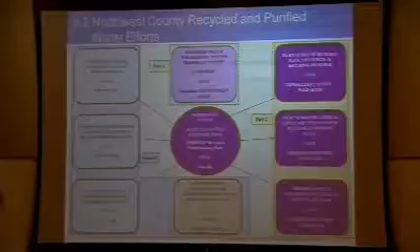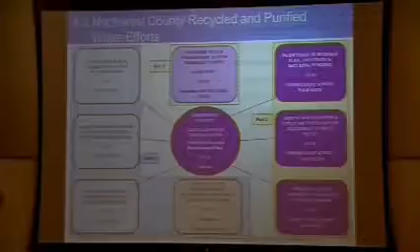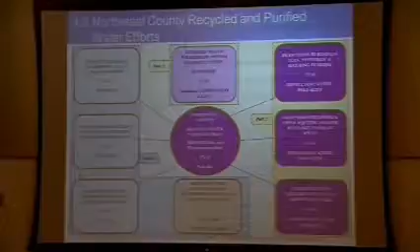You've seen this sort of diagram before, and the purple parts of it, dark purple, are what would be incorporated in this strategic plan that was before the district in July. We're still seeking approval of the cost sharing agreement with the district to move forward on a contract for those 4 purple elements. You'll notice all of them on this whole page really roll up into this strategic plan.

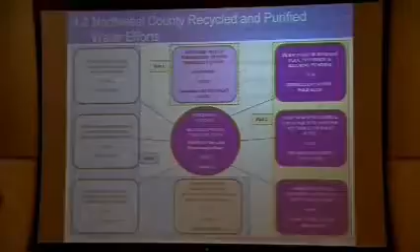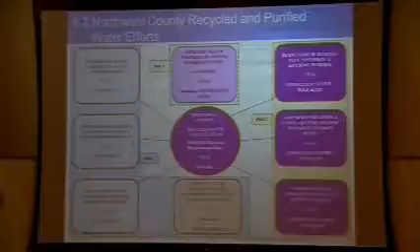So the center circle, the strategic plan itself, is something that wouldn't happen immediately. It would happen as the 3 parts to the right are completed and fed into it, and then the other elements are fed into it. We've been talking about, and it is a little bit confusing because there are a number of ways it could ultimately happen, that we tie the various systems together in the county.

So at the bottom, you see in sort of a brown color, Mountain View's efforts. They have several contractors over time who are working on their own expansion plans for their distribution system, and it says, and Sunnyvale tie-in. So think of it as a smaller tie-in, as Greg Hosfeld described, to be worked out in the future, but we would then bring that up into the strategic plan itself.

You'll notice this recycled water strategic plan doesn't include an element for what you might call a much larger tie-in, where a pipeline you could imagine could be built from the Palo Alto treatment plant to points south. And that's not on here.

I expect that in the MOU that we talked about just now, between Palo Alto, Mountain View, and the Water District, that'll be one of the key things we'll address, is how are we going to accomplish the work to evaluate that idea, what I'd call a larger tie-in, not just the Mountain View, Sunnyvale little arteries connecting with one another, but rather some larger tie-in.

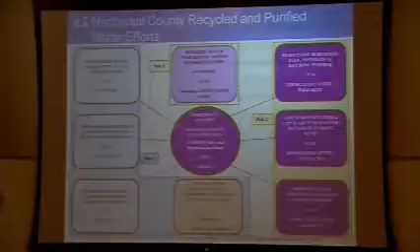We've kind of all agreed, district staff also, that more work needs to be done to draw conclusions about the aquifers in the Northwest County and the extent to which they would benefit from what you might call recharge, what you might call storage. That whole thing needs to be better explored. And we've talked about this before. Councilmember Siegel wanted to make sure that we also explored the plumes that exist, the contaminated areas in Mountain View and Palo Alto, which unfortunately are extensive, and we'll certainly be doing that.

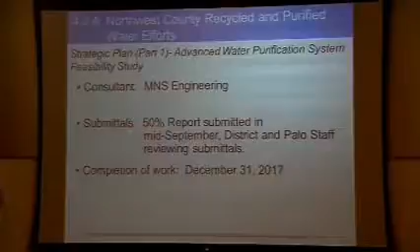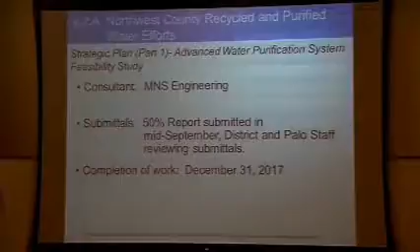So again, just to sum up, those 4 purple bullets constitute what we've called the contract effort, which we are wanting to see move forward now. Oops, what am I doing? Too far. All right. So a different contract that was actually in the upper left-hand corner of that previous chart was the work that we're doing to look at a relatively small first step to advanced water purification at the Palo Alto treatment plant site.

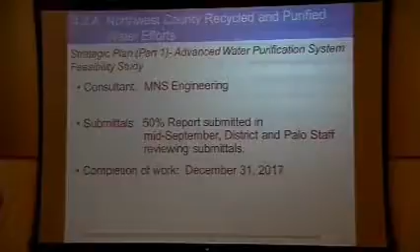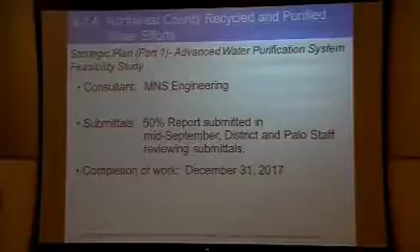The consultant has been selected, MNS Engineering. They're actually 50% done with the core tasks, and we expect to be 100% done with those core tasks by December of 16. And then that last bullet says completion of all of the follow-up tasks would be December of next year, 2017. So by December of this year, though, we hope to have a pretty good feasibility study on the first steps, small plant, to do reverse osmosis and to upgrade our water quality, lower the salinity for the Palo Alto and Mountain View recipients. And we're excited about that.

We've identified several places on the site, our Palo Alto site, where a relatively small plant of 1 to 2 MGD could fit. It's tight, but it looks very doable. So we're excited about moving ahead on this. I'm going to turn it back over to Garth. I think he wanted to do this one.

Committee members, so on page 46 of your handout is a quick replay on what Mr. Boble mentioned just related to that chart back on your page 44. So these are, in the terms of that strategic plan, those relate back to the blue-purple circles, or the circles and squares on that chart. These are the key things that would be involved in the strategic plan, and that is, first of all, look at expanding the recycled water pipeline, the one that has already been contemplated and mapped out in terms of EIR work, to South Palo Alto and Stanford Research Park.

And then the final one would be, I think one of the questions came up is, what is the footprint of all these studies? And this really talks about it is to all of the TRIB agencies that provide wastewater into the Palo Alto plant. That is the target of the partner agencies here, as well as the Santa Clara Valley Water District. So the expansion of recycled water would be looked at to each of those entities to see how feasible it would be.

So, and back to Director Kremen's question earlier, what is the end product? The products, once deliverables are completed, would not be at the point where commercial terms are ready, but that would be the leaping point from which commercial terms on any of those that prove to be feasible and are well-funded and supported by the entities involved would be an opportunity to move forward with that.

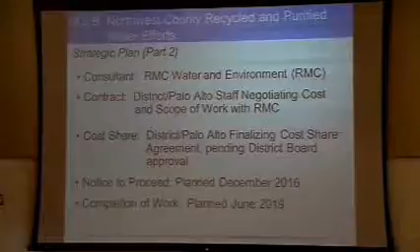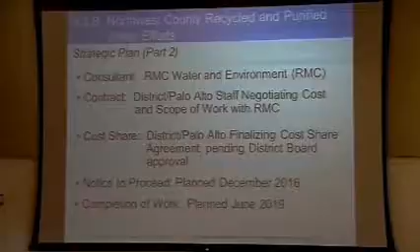So just in terms of the mechanics of that, a quick reminder that the consultant selection work is complete. For that, RMC Water and Environment was selected in a competitive process. The current work is that the scope of work is relatively finalized. There may be some tweaks, but it's ready for execution. The cost share agreement is something that was being discussed at our committee level at an earlier stage, but not been brought forward to our full board for approval yet.

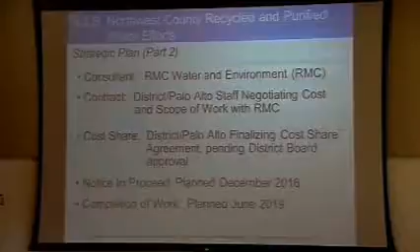And that would be a share that the district potentially would make into that project, where we would pick up 90% of the overall cost, Palo Alto picking up the remaining 10% to carry out that work. The overall scope of work is contemplated to be $2 million. So the district would potentially be picking up, if the board agrees to that ultimately, would be 90% of that. So the schedule that is hoped for is to have a notice to proceed in December and complete the work back in June of 2019.

Should I just add, before we move on, that related to that work, in light of some of the confusion that arose related to multiple parties potentially working with Sunnyvale and so on, and is this particular scope of work perhaps an overlap? I have reviewed it, and my staff has reviewed that scope of work, and I'm satisfied that the scope of work is what was originally contemplated between the district and these entities. It is beneficial, I believe, to all of the entities in that Northwest County area, and it would be necessary for us to complete these particular deliverables identified just a moment ago.

So I think the question would probably be, in terms of guidance from the district board committee members here, whenever that committee is ready, as to what steps do they wish staff to take further in that regard.

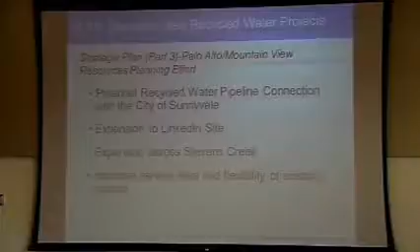So the overriding issue for us at this point is watching that feasibility study. We're supportive of the effort. We like the way it's going. We think that at the end of the year, that's going to give us a lot of justification and information for expanding our own recycled water system within Mountain View and then potentially regionally.

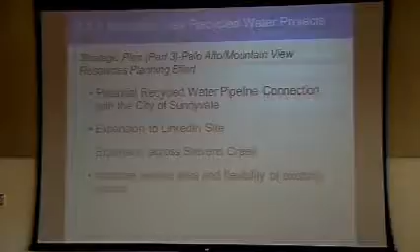There's one small project that we're looking at right now, and that is serving what was to be a Google site and is now a LinkedIn site on Middlefield Road. The City of Mountain View has no infrastructure for recycled water in that area, and we are working closely with Sunnyvale so that they can supply that development, which although in the City of Mountain View is right next to Sunnyvale's recycled water system. I believe it's on the order of 25 acre-feet per year, so not really a huge use of recycled water, but really an opportunity for us to begin developing that partnership for the long term.

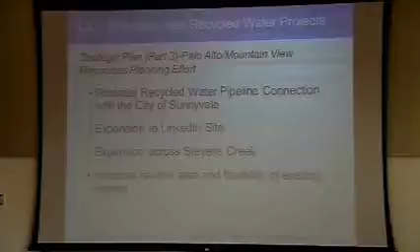The larger expansion we're looking at is for a development on the east side of Stevens Creek. That's called the Bayview development, and that's still in the planning stage. And then we would also be supplying the area of the NASA Moffett Field site. The pipeline that runs through NASA Moffett Field is actually under construction. That is on federal land at this point. We are working with project representatives to develop agreements wherein we will supply recycled water across Stevens Creek. We are currently reviewing plans for what that's going to look like.

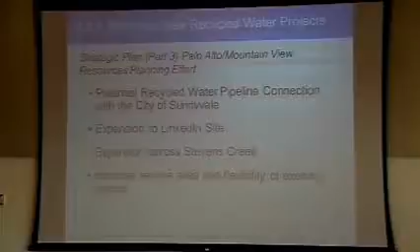We should have one pipeline going across Stevens Creek, hopefully by the end of 2017, so we can start supplying them. And then ultimately, I imagine we will have a second line going across Stevens Creek just to add to system reliability. At this point, I would estimate that would be in the several 100,000 gallons per day of recycled water use, possibly up to 500,000 by the time all the developments are in there.

Again, going back to my comments on the feasibility study for the advanced treatment, as the water quality improves, we know that there will be additional uses above and beyond what we foresee at this point. So indoor building use; it will be more acceptable for different types of landscaping, cooling towers. So as that water quality improves, we look at that as an expanding effort.

Kind of separate and distinct from everything else, we are looking at small increases in the service area within the North Bayshore area of Mountain View. That would be things fairly straightforward, like adding loops to the system, adding a street here and there as there are some new developments. So I think regardless at this point of the progress of the advanced treatment, we will expand our recycled water service area incrementally in preparation for the water quality improvements that we believe will come in the long term. And that concludes my comments on Mountain View's efforts at this point, unless there is something else you'd like to know.

Great. Any questions or comments, Mr. Griffith? Yes. Does Mountain View have any regulations for their new development in terms of requiring dual plumbing for these? We are not requiring it at this point. We do work with the individual developers to see what they want to do for their sites. Some developers will do some on-site reuse. Some will put in the dual plumbing, but there's not a requirement at this point.

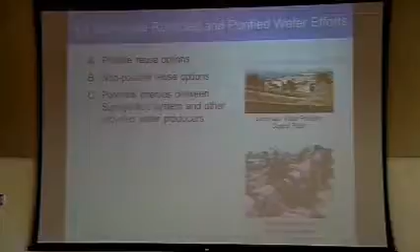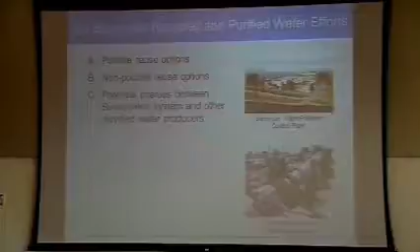And as mentioned earlier, in order to try to make sure that we work together in a kind of organized fashion on that going forward, we have been working for a while on a draft MOU, and that is reaching finality relatively soon. We've also been working with Sunnyvale on non-potable reuse options, and that has to do, for example, with the service to Apple. We'll touch on that in just a moment.

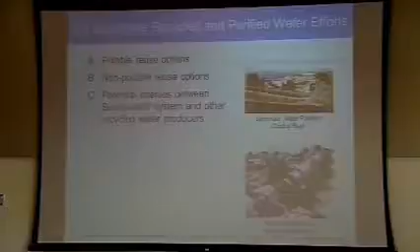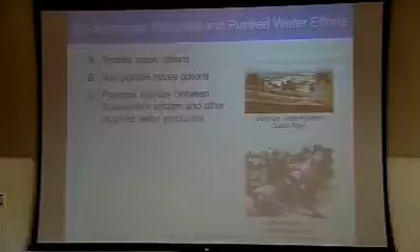Interties between them, we're going to touch on something relatively new. We brought it up at the June meeting of the Palo Alto Mountain View District Recycled Water Committee right at the end, which in fact led to this joint committee here. The question posed by staff was would Palo Alto and Mountain View be interested in working with Sunnyvale to look at interties that can maybe connect the systems together, and the committee indicated yes. And so we will touch on that in just a moment, because there have been some concepts there and further to be developed. So, John, did you want to say anything about our work together?

Sure. Yes, absolutely. So Sunnyvale has made it very clear, the council has made it very clear that we're enthusiastically supportive of moving ahead together with recycled water, both potable and non-potable, and we're kind of taking the lead from the district in terms of what mix of that works best. And as Councilmember Griffith mentioned, we're in the middle, and so there's a lot of interesting opportunities in terms of connecting to both Palo Alto, Mountain View, potentially even San Jose, and then serving down to the south. So we're very excited that we're moving ahead on this, and I'll let Garth continue with the presentation.

Quick question: have you had the salinity problems that we've had? Yes, we have a pretty similar salinity to what you have, and so we're also looking at certainly a purification facility and potentially something similar to Palo Alto, where you're shaving off some of the salt and getting it down. Probably the same reasons that you have, a lot of infiltration close to the bay.

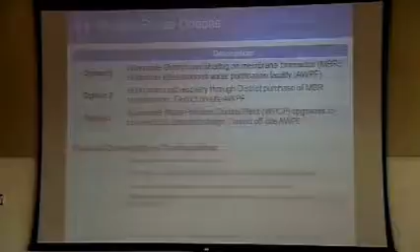One is the concept of, instead of going off-site like in option 3 to an adjacent spot, looking at a multi-story level, using a small land footprint within the water pollution control plant of Sunnyvale, probably 3 or 4 stories for a decent-sized purification facility. It has many O&M challenges that we have at least identified, but they may not be insurmountable. So we're taking another close look at that concept.

Also, this is a totally different scale of evaluation as contemplated as we looked towards our expedited purified water program. How do we look more broadly in terms of those steps there? One of the options would be to take, rather than do any treatment locally of purified water at Sunnyvale itself, move the wastewater east and south to Zanker Road, to the City of San Jose, Santa Clara's regional wastewater facility, and blend it in there and add to the purified water capacity at that point.

So the pipeline would be running east from Sunnyvale to make that happen if that concept were to bear fruition. That is something that we're looking at at a conceptual stage. Thirdly, on that list at the bottom of the page, something that had previously been not available to us because of a position taken by the City of San Jose has reopened as a possibility, and that is really strongly building interties between the South Bay water recycling system and Sunnyvale system. In other words, the concept there would be that the City of Sunnyvale would become an enhanced producer of traditional recycled water, and then optimize the distribution of that, not only within the Sunnyvale area, but moving east into perhaps Santa Clara South Bay water recycling.